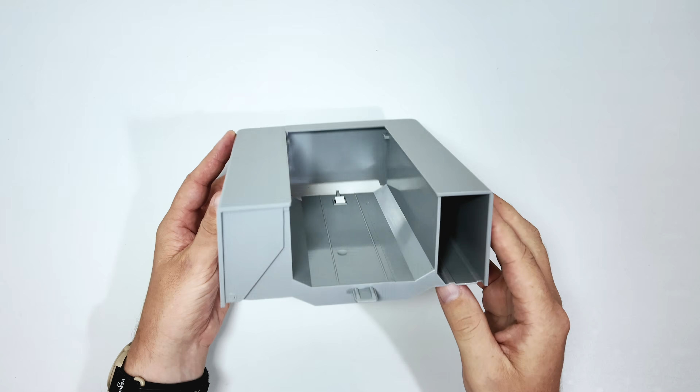It is one of Singer's heavy duty lineup and I love it. There are lots of websites where you can get these 3D print files. The website I'm using today is called printables.com, and I'll leave a link to it in the description below.

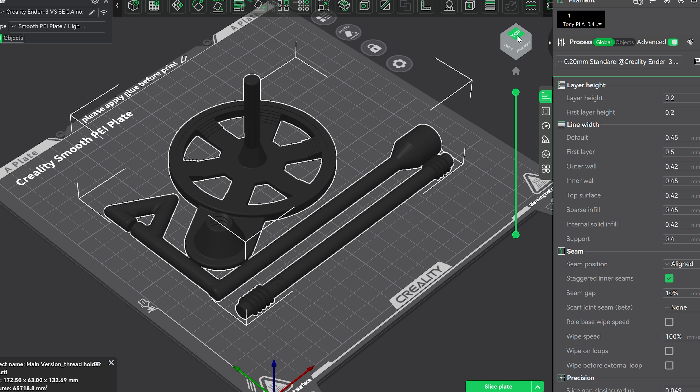So I have it here on my 3D print slicer software, and yeah, the whole thing is just one file. You don't have to print out individual pieces. It's just in one go. The whole thing prints as one file, which is really, really handy.

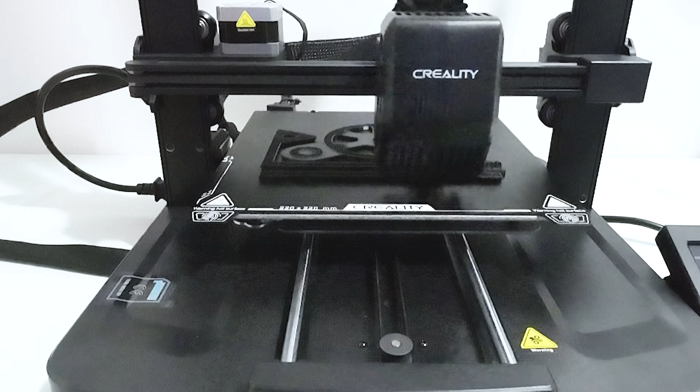The 3D printer I'm going to use is the Creality Ender 3 version 3 SE. I don't know, it's too many letters. And the filament we're going to use is just regular PLA.

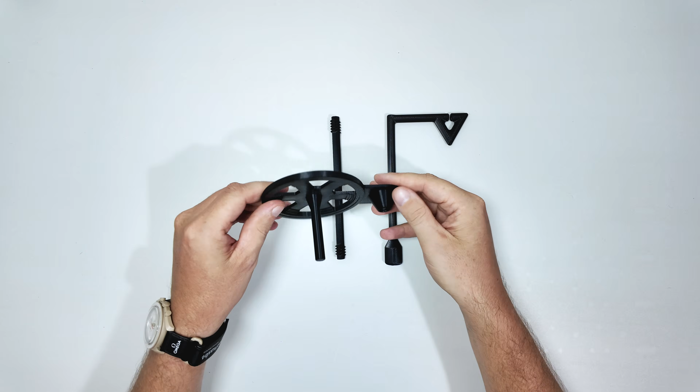Okay, so we have all our 3D printed pieces here. So we have the base piece. This is where your thread's going to go. Then we have the top piece that the thread's going to go through. And then you got a little extender piece, which makes the whole thing tall.

So this is my first time putting it together. I'm not sure how good it's going to be because it's all 3D printed threads and I've never done that before. Okay, how's that feel? That feels pretty, oh my god, that's really snug. That's a snug fit. And this is our big piece that extends over. Let's see how that looks.

Oh, you know what? That's not too bad. I wish it was more aligned though. Eesh, like there. You know what, that's still solid. Not too shabby. So, yeah, I'm happy with that.

So this is where your thread will go. Then the thread will go up here through this little notch, and then over to your sewing machine. So let's give that a try here.

So I've got these big spools of thread now. I've got this one, and I've got like a cowboy yellow for my denim. So I want to start working with denim a bit more. So the thread will go up here, it'll go through that little notch, and then over to your sewing machine.

Yeah, that's good. I like that. I ain't got no complaints there. So that's what it looks like. Yeah, I'm pretty happy with that. Nice, I highly recommend that.

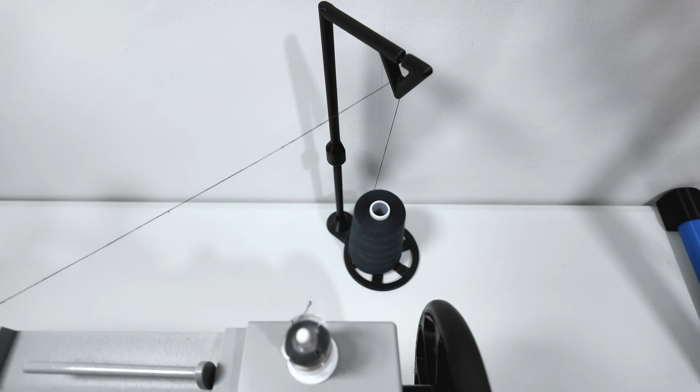So I kind of got it where it's going to be placed when I'm actually using it. And as you can see, the thread just goes right through that thing and right to where it feeds, where your regular thread holder feeds, and then you'll just thread your machine as normal, and yeah, all is good.

Next up, I want to start looking for some Singer Heavy Duty specific accessories.

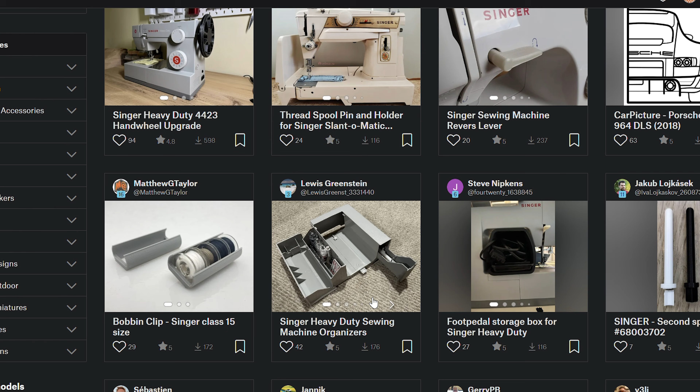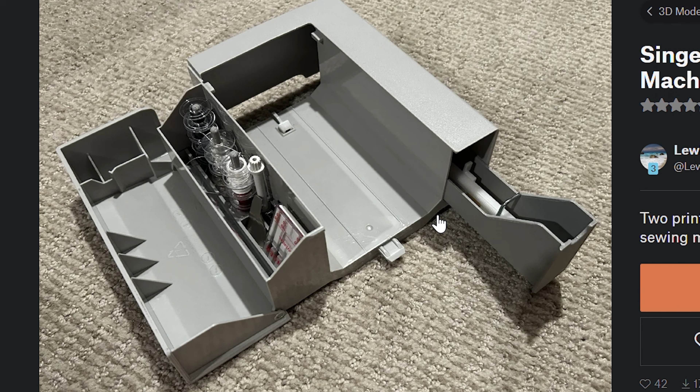So we'll head back over to Printables and I'll type in Singer and we'll see what they got. As I just showed you, there's a big space there and they have a box that you can put in it. So this is it here. This is the Singer Heavy Duty Sewing Machine Organizer, and I guess it's like a kit. You get the box and you get an organizer for the big open pocket thing. So those are the two files, I'll download both of those and we'll see how they do.

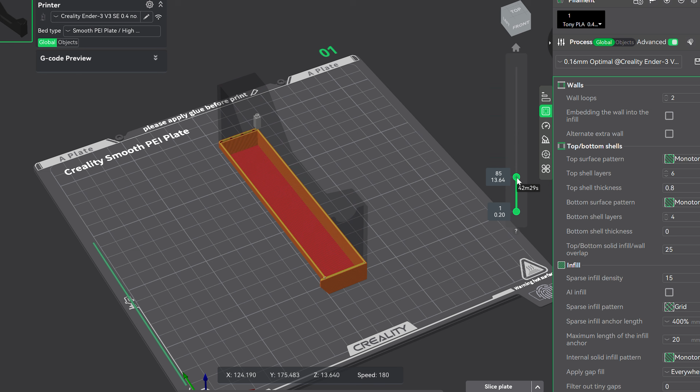So I'm back in my Creality slicer and I've got the box here loaded up. Unfortunately, you have to print each file individually because it's two separate files. So we got it sliced, we're going to use a 0.16mm layer height, and we'll send it over to the 3D printer.

Okay, so next up we have the little box thing that we made. This is meant to go down the side of the sewing machine thing, so yeah, it's got a lot of space in there. You could probably put some bobbins or whatever. So let's take a look here.

Boom. Oh my goodness, that's perfect. That's a perfect fit. Wow, that is good, I like that. You got a little finger hole in there, which is not big enough for a finger, but I'm sure that's what it's for. But there's a little lip here, you just pull on that lip and the whole thing comes out. So yeah, I'll give that a 10 out of 10. That's a good one, I like that.

So next up we have the main pocket. Ooh, so let's take a look at that one. I need to apologize for my very unorganized side pocket here on my sewing machine. I just got all the little accessories piled in there, but hopefully this new accessory will help us organize that.

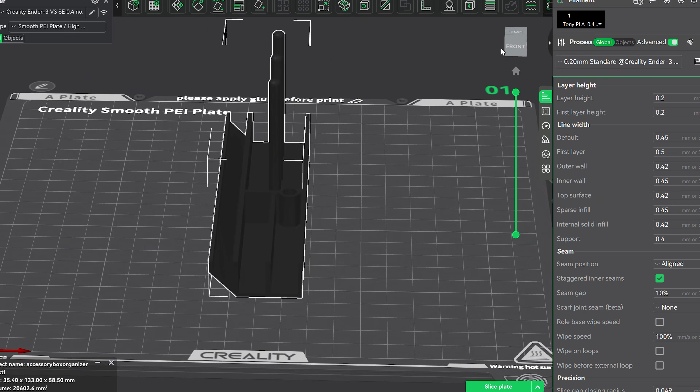So we're back in the slicer, we got it loaded up, and we are just going to print it the same way we printed the box, 0.2mm layer height. We got it sliced, and we'll send it over to the printer.

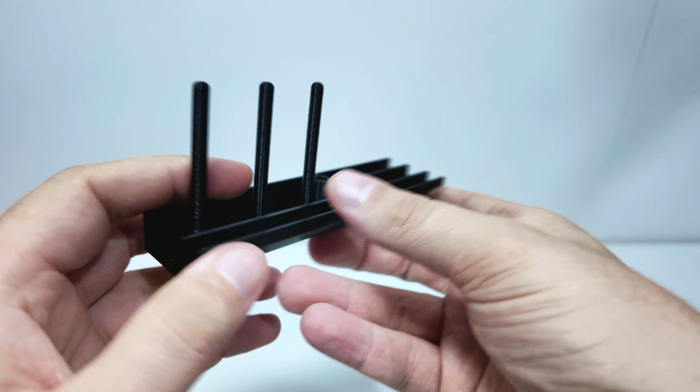Next up, we have the organizer thing. So this is supposed to go in the main fold open area of the sewing machine. I don't even know what the name of this is, honestly, I don't want to lie to you. Let's take a look here.

Okay, that don't fit. Does it fit this way? Yeah, that's a squeeze. Oh my goodness. Yeah, okay, so this one doesn't fit. If I was to print this out again, I'd recommend printing it out at like 97% scale instead of printing the file as is. So I think I'm just going to try and modify it.

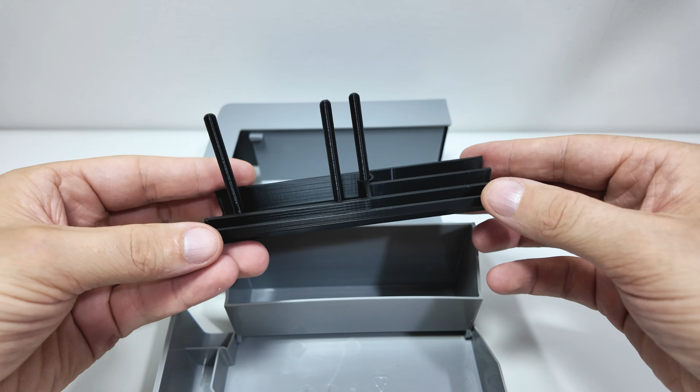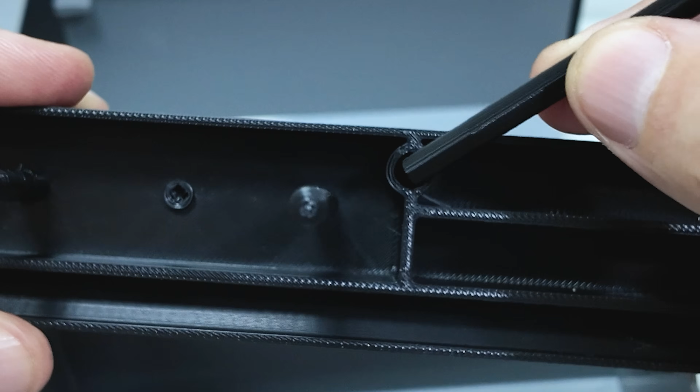I'm going to get some sandpaper and sand down one edge and see if that helps a little bit. Okay, so I'm back, I took some sandpaper to it, and what I found is it'll fit in this way now, but it's actually not long enough this way. So it needs to be printed at like a 97% scale, I think, for it to work. Also, when I was sanding it down, I ended up breaking one of these things off, so yeah, that snapped off. Luckily they designed a little hole there, maybe that's what they thought, they'd be like, yeah these are gonna snap, so let's just put a hole in there.

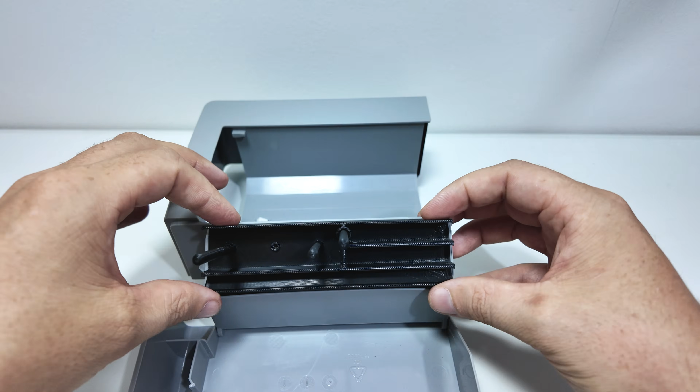So yeah, we got that. Do I recommend it? I don't know. Print it at 97% scale, let me know what you think. But for me, I'm not going to be using it, and I don't think it's useful enough for me to want to print out again. So, other than that, the little box thing here is perfect, and the thread spool, awesome. But this, I don't know. As I said, it doesn't fit the Singer denim very well, it needs to be a little bit smaller.